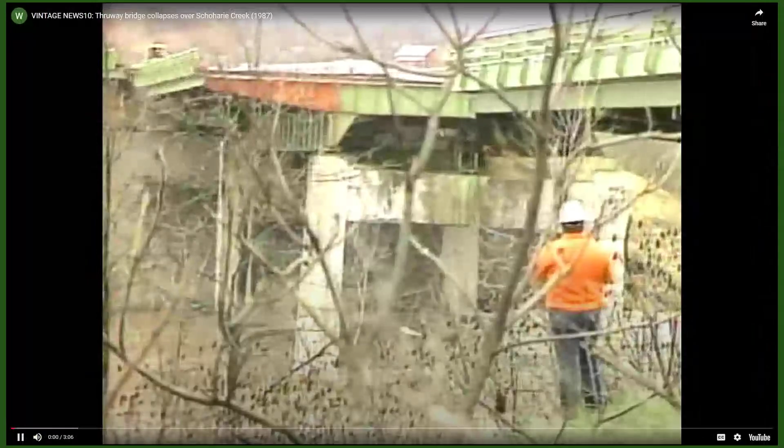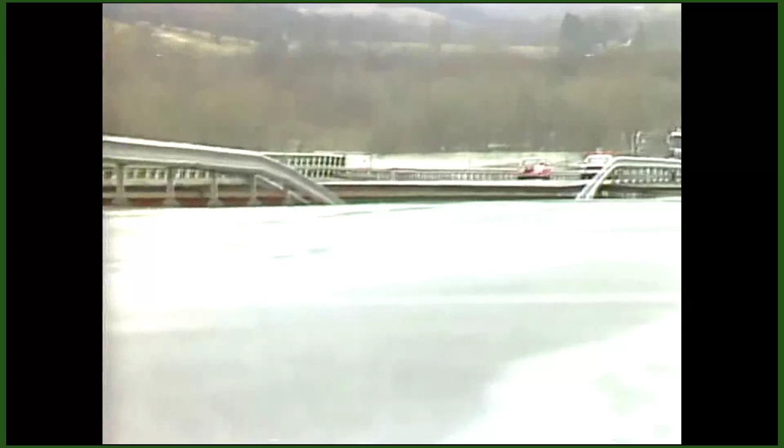Portions of the Schoharie Bridge continued to fall hours after it initially gave way. The collapse sent cars and a tractor-trailer plunging into the raging floodwaters below. Just how many lives and vehicles were lost remains unknown. One witness says 4 cars and 1 tractor-trailer; another says 1 tractor-trailer and 1 car. It sounded like lightning struck when the bridge went out, and it just collapsed from there. Witnesses say it was all over in 15 minutes. The eastbound lane went first. For the drivers of these trucks it was a very close call. 'It cursed me out when it went down.' Plenty of police and rescue crews arrived ready to help, but the waters were moving too quickly and the risk was too great. All they could do was clear the area of traffic and keep the curious a safe distance away.

The governor arrived to survey the damage and watched as still more of the 400-foot span came tumbling down.

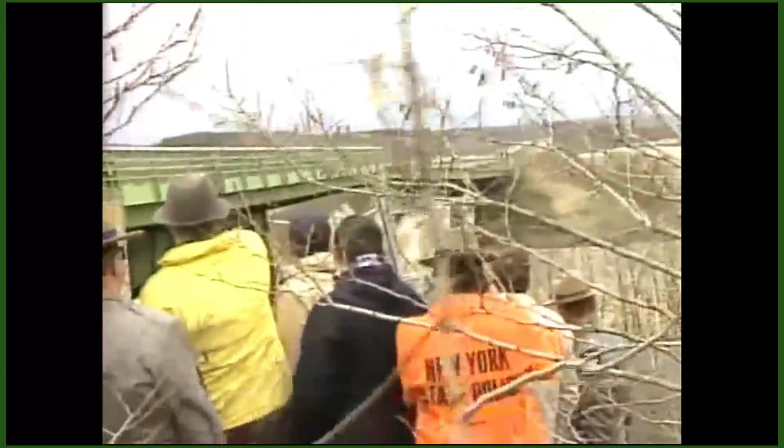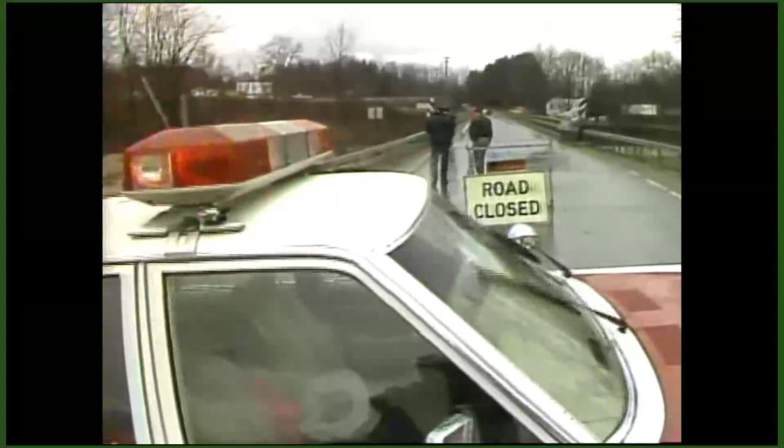We don't know exactly what caused the collapse of the span. We're going to be very cautious about this, and any bridge that the state police, the Department of Transportation, or the Thruway see as something to be avoided for the time being, we're going to avoid it. Now there'll be a lot of unhappy people and a lot of detours, but so be it. All of the other bridges along Schoharie Creek were closed since 6 a.m., including this one at Mill Point, which appears ready to give. Residents here want to know why this bridge wasn't also closed down. If there was any thought whatsoever that this bridge was in danger, this road would have been closed.

So there's a little more of that video, but it pretty much shows you what happened there. The National Transportation Safety Board figured this out, and the two terms we should be paying attention to here are scour and spread footings. That accident on Schoharie Creek is what caused the National Transportation people to figure out that we needed to start inspecting for scour.

The scour critical definition is here on the screen. The NBI coding guide item 13 uses numbers and letters to code scour vulnerability, and we'll go over those.

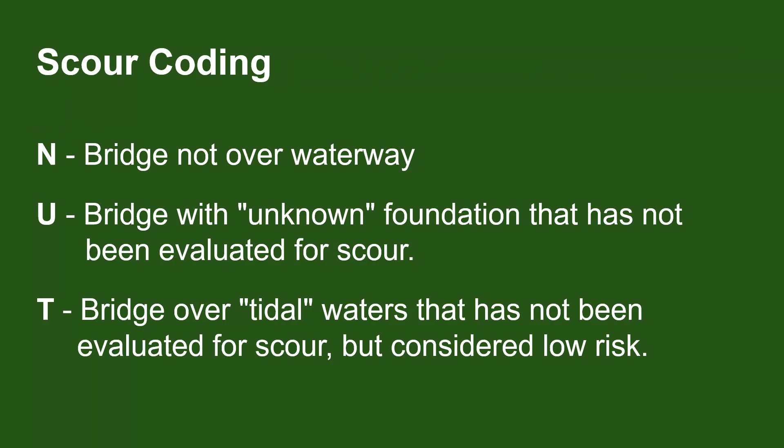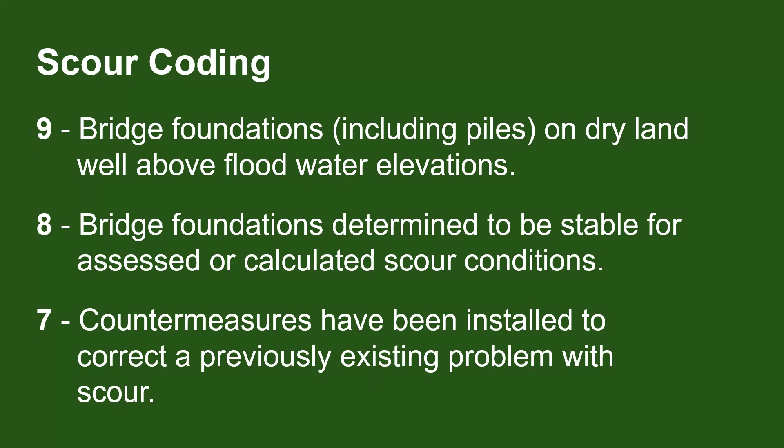The U is for bridges with unknown foundations. We have to consider those scour critical because we're not sure whether they are spread footings or pile. We just don't know, so they're going to be treated as scour critical. We don't worry too much about structures with a 9, 8, or 7. Sixes should be monitored because we don't know what their vulnerability is. And 4s have been identified as something that could use some form of mitigation, but hasn't been done yet.

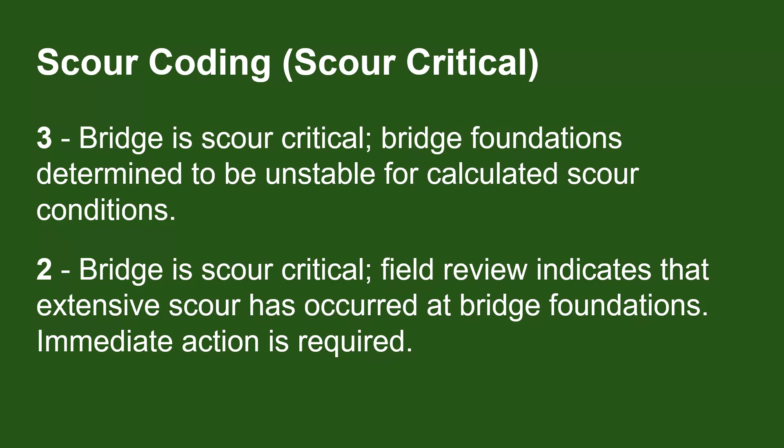Now here's a couple that are in the scour critical coding. 3s and 2s need to be monitored during high water events, and they're calling for current mitigation on all 2s. They've already located some problems with those that should be taken care of. Hopefully none of us will see 1s or 0s. A 0 pretty much is a bridge in the water. We just looked at that for Schoharie Creek.

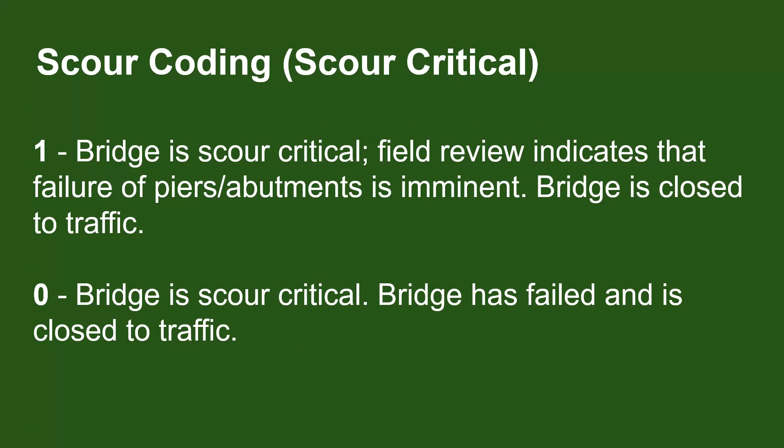So this is a picture of aggradation. Aggradation is the buildup of materials, usually in places that we don't want it. In this particular case, we've got a gravel bar forming where the channel should be.

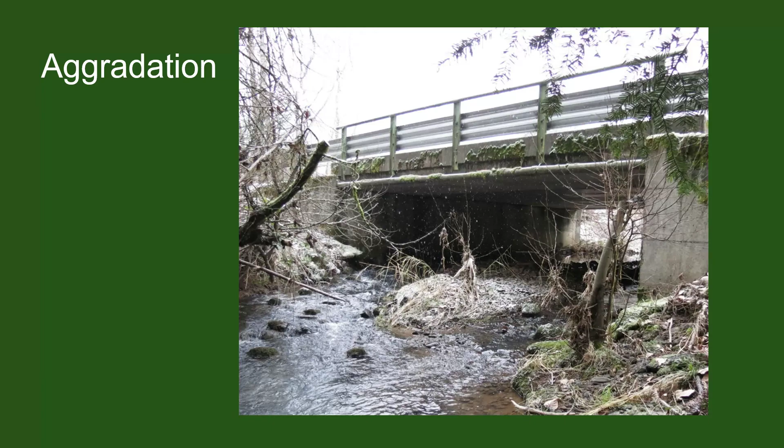This is degradation, and that is the removal of materials, again, usually in places where we don't want it. This happened at an abutment on one of Clackamas County bridges. It didn't adversely affect the bridge because the pile tips were deep enough, but it washed away the abutment to where eventually there was just a patch of asphalt going over the gap between the remaining abutment and the bridge. This can also be considered local scour. Local scour is something that happens on an object in the waterway.

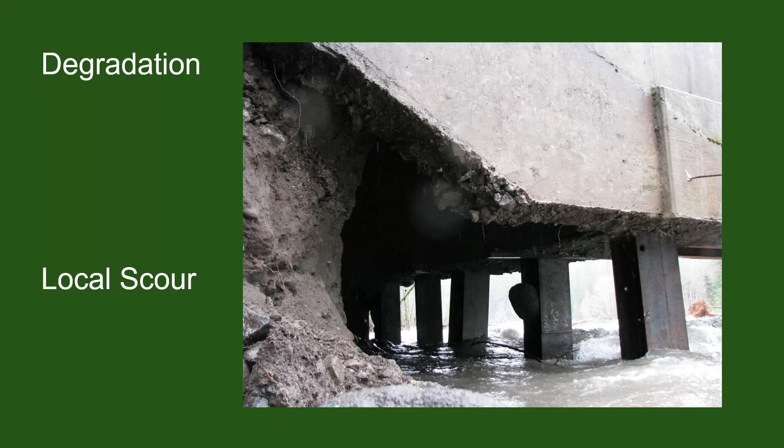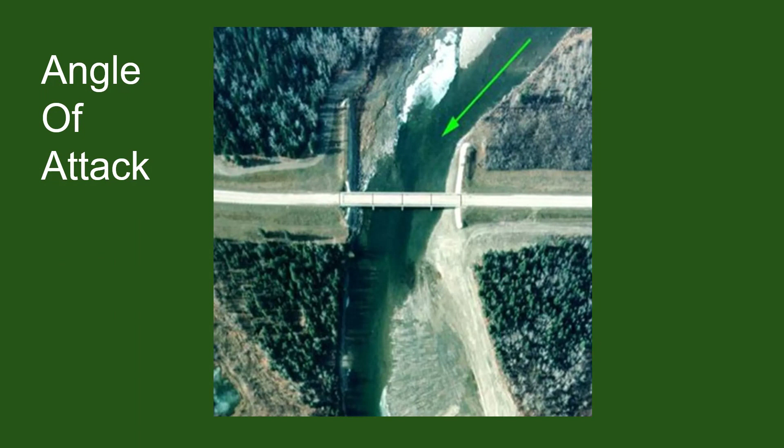A plan of action - so all critical bridges, scour critical bridges, need a plan of action. They include a lot of information, but essentially they're there to tell us what to do in high waters, how we mitigate things, pretty much everything to do with scour on that particular structure, and they are a requirement for all scour critical bridges.

Again, ODOT, the Oregon Department of Transportation, helped us with these plans of action. Here's all the information that's in a plan of action. It's pretty detailed. Some of it's more important than others, and depending on what your job is, it will change what's important to you.

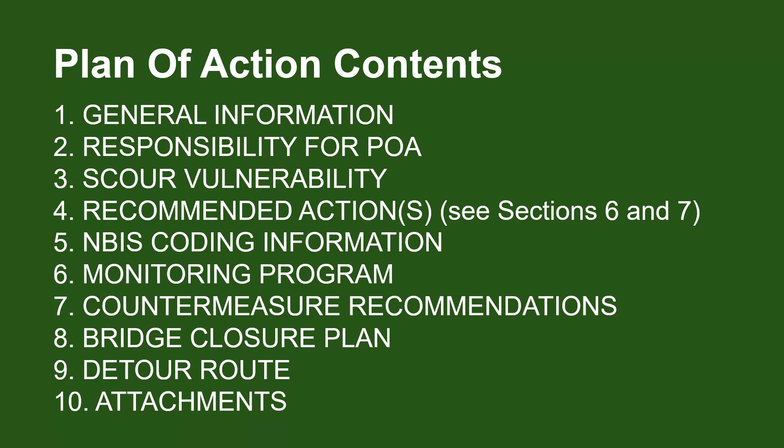So this one is probably the most important part - what type of footing is it? This one, we can see it's spread footings poured on bedrock. Who's responsible for the plan of action?

What is the scour vulnerability? The scour evaluation summary highlighted there is the current condition of the bridge. Below there's some history, but the current condition is what we're really interested in, and that's the information we need to take with us when we go to the field to do high water inspections.

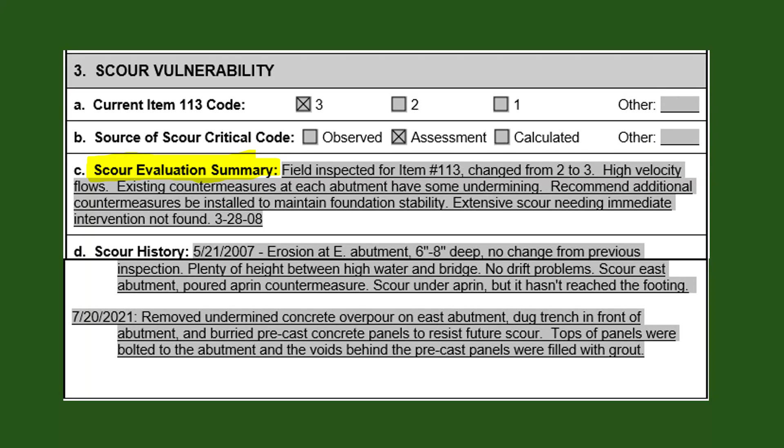So this is what we should be doing and what we have done. Recommended actions.

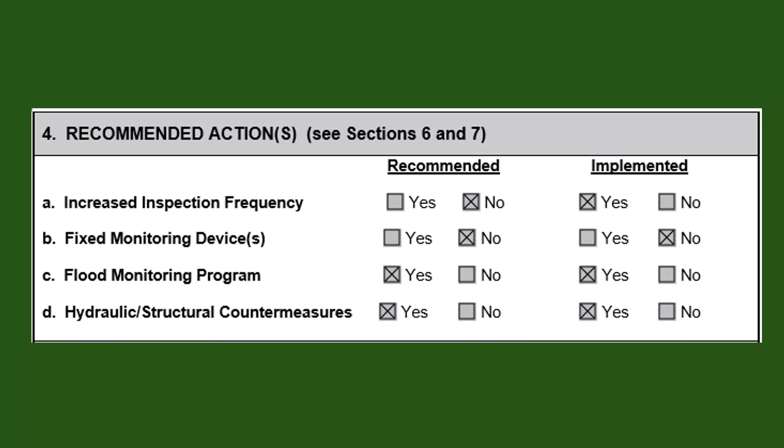In the monitoring program, the important thing is what we're looking for. In this case, we want to make sure the spread footings aren't undermined.

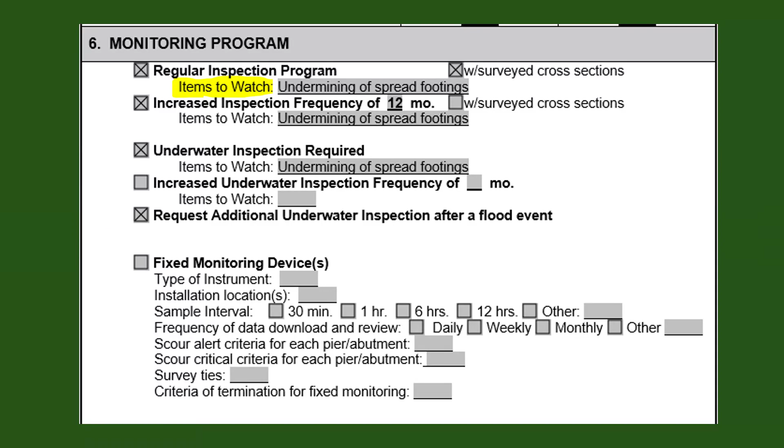This is further monitoring information. How are we going to inspect? When are we going to start? In this case, it says bank full. What stage of the river level do we go? And how often do we monitor it?

The how often is going to change with every event. There are times we can go up and look at a bridge and the water level maybe just hit bank full, and there's not a lot of problems we can see. Everything looks good, so we might not go back for 12 hours, 24 hours.

But there are times we've gone up and looked at bridges where we don't leave as soon as we get there. A good example was that bridge where the approach got undermined. As soon as our inspector got there, they didn't leave.

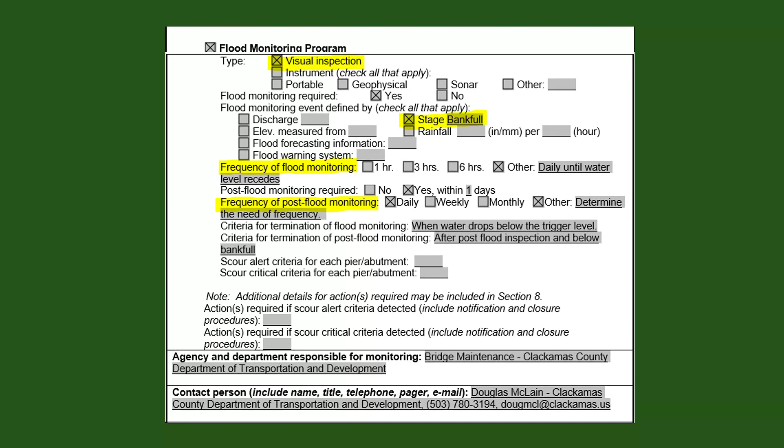Countermeasure recommendations. This is for that same bridge. It's sitting on bedrock, so there wasn't much we could do to improve it. There's nothing in there about what we were going to do to fix it.

This is a continuation of countermeasures.

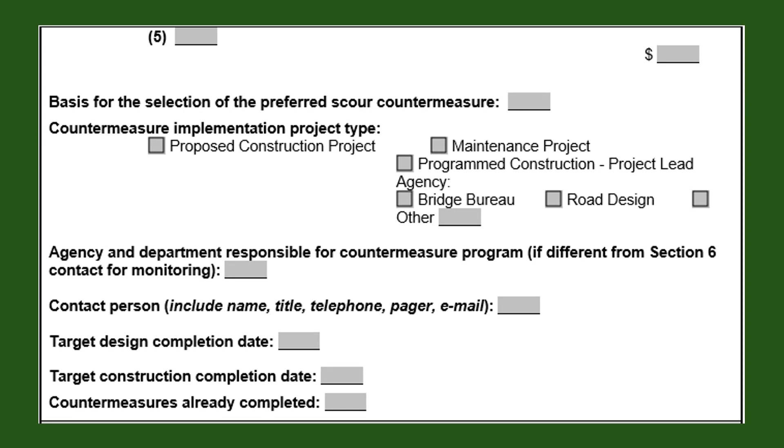Detour routes. This was on a dead-end road, so we didn't have one. But if you did, this is where the detail for that detour route is filled out, and there should be a document in your attachments showing that detour route.

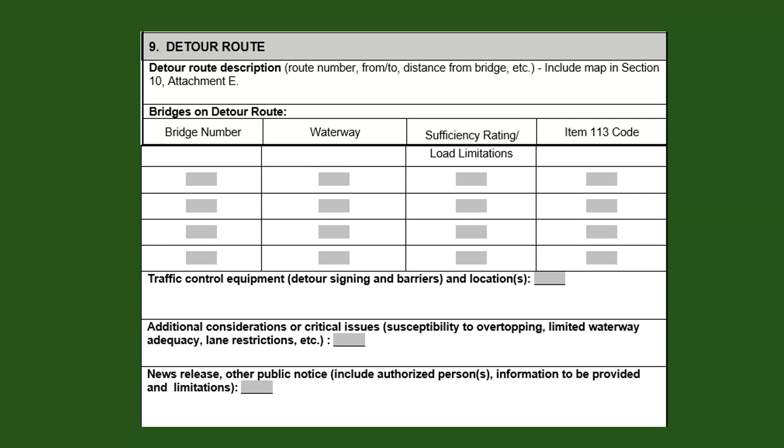You can see the check marks here. This one actually says it's supposed to have a map showing the detour route, but I guess our POAs need a little bit of work.

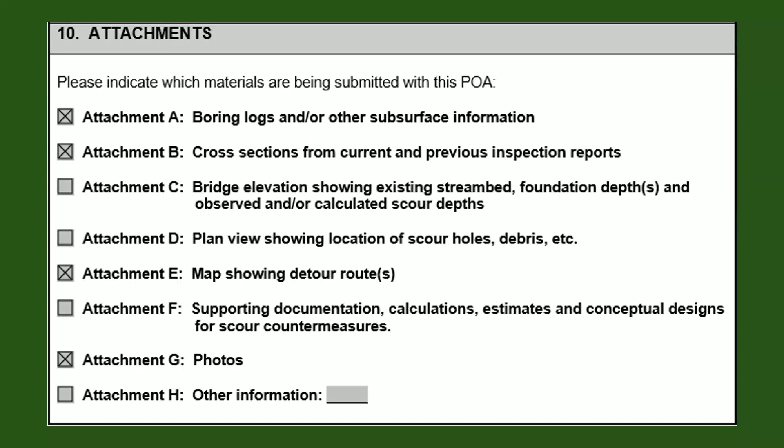This is a copy of one of the documents we take with us into the field for inspections. It's sorted by drainage and sub-drainage and identifies the affected areas of the foundation, what type of foundation, and any history that might be pertinent.

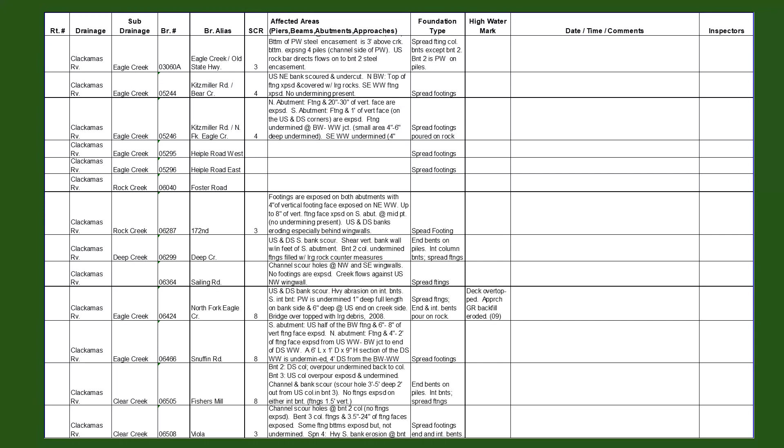This is a close-up of the most important part of that document. You can see the scour code rating, the affected areas, and what type of footing.

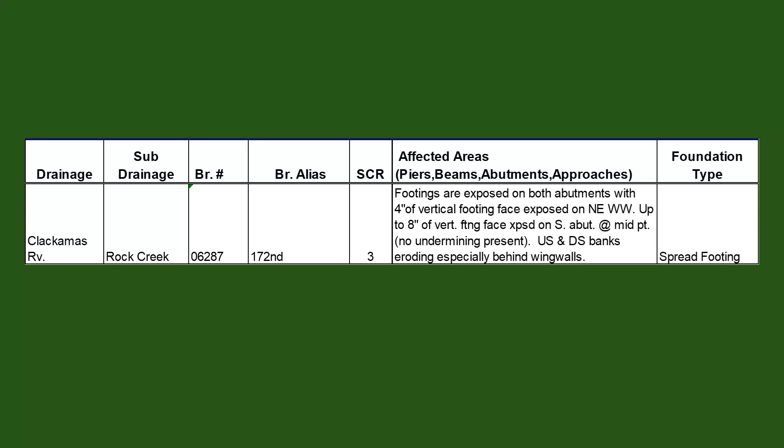Most of our sub-drainages, even the ones that have gauges, aren't going to have anything that predicts what the flow will be for the next few days. So we try to look at all the sub-drainages whenever we go out and look at the major drainages. If the sub-drainages aren't affected because the major drainage is reacting to snow melt, maybe we won't go back next time to look at the smaller drainages. But everything in the main drainage, if that NOAA prediction says we're going to bank full or action stage, we'll go out and look at all those drainages at least once.

So what do we look for when we get there?

Obviously, we should all know at this point not to drive through water. We have had fatalities in Clackamas County where we had an overtopping of a bridge and somebody did try and drive across it, and it cost them their lives.

So, pressure flow at the low bridge. It does say pressure. If we've got essentially a pond where the water's backed up and it's covering the lower chord of a structure, that's not nearly as concerning as if it's in a streamway where you've got velocities pushing against it. Most modern structures are a little different because of seismic design, but most older structures really don't have any type of reinforcement for horizontal pressures. So when you start seeing water flow against the lower chord, it's time to consider closing.

Vertical or lateral displacement - how do we know if something's moved? One of the best ways is to look at the guardrail or the barriers. Most of the time that bridge has a barrier of some kind that goes across and is attached to the approaches on each side. If the bridge moves, you're going to see a bow in that guardrail, up, down, right, or left. That's a really good indication if you've had some movement. The other thing you could look at is misalignment of the road striping. If you come up to a structure and the stripes don't line up, there's a chance the superstructure has moved.

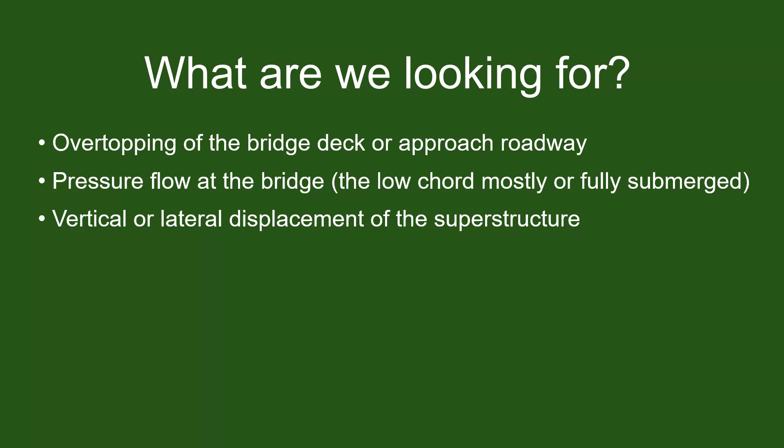Excessive horizontal or vertical separation - you're probably going to look for the same things you'd look for with vertical or lateral displacement of the superstructure. If the joints are out of whack, it's because the superstructure essentially moved. You may notice a place where, if you had rotation one way or the other, the guardrails or barriers wouldn't have shown it, but you could go up and look and say, hey, that joint used to be 2 inches wide and now it's 6. Well, you probably had some kind of rotation there if that happens.

The problem with damage is sometimes that damage is already there, but it helps if you know what your structures are. The question you've got to ask is: is the damage I'm looking at new?

Sinkholes in the roadway - don't forget, we had that problem where we lost all of the fill under the roadway, but we didn't have a sinkhole. All we had was a piece of asphalt, which wouldn't support much.

And debris buildup. Debris buildup isn't really scour, but when we do high water inspections, we're looking for that as well. A big pile of debris can put a lot of stress on that bridge and give you that horizontal pressure that you're trying to avoid.

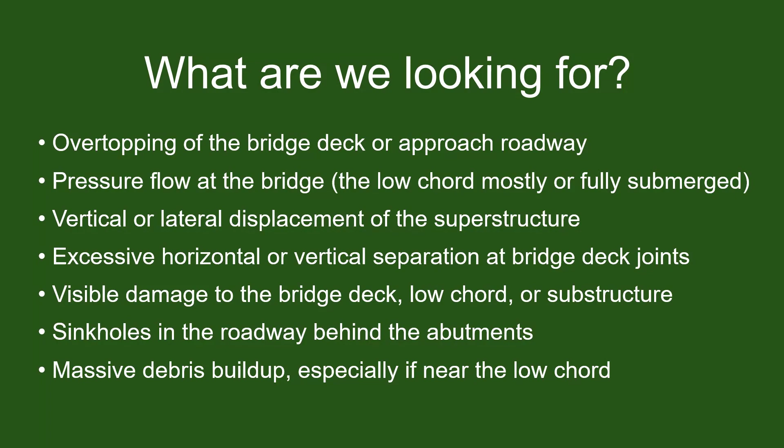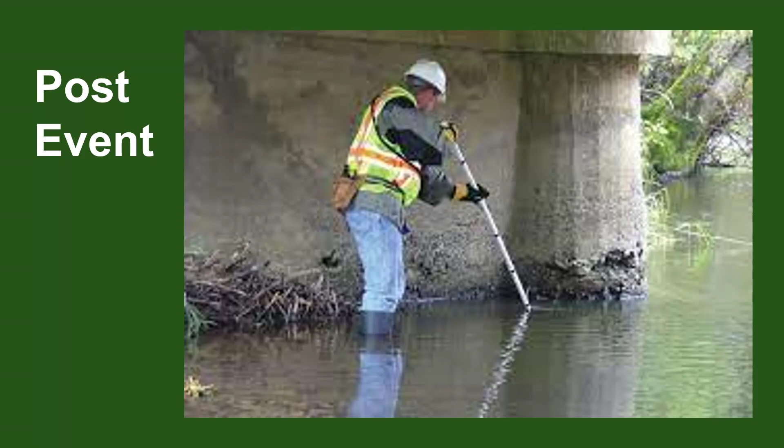In the areas you can't actually walk to, we'll get a diver out there and they'll put their eyes on it. In our case, all the diving is done by our state agency, and they will take a look at these on a regular basis and give us reports. If we had a situation where we thought there was some scour and we couldn't get to it, we can call up the state and say, hey, we think there's a problem there, and they'd send somebody out to dive on it.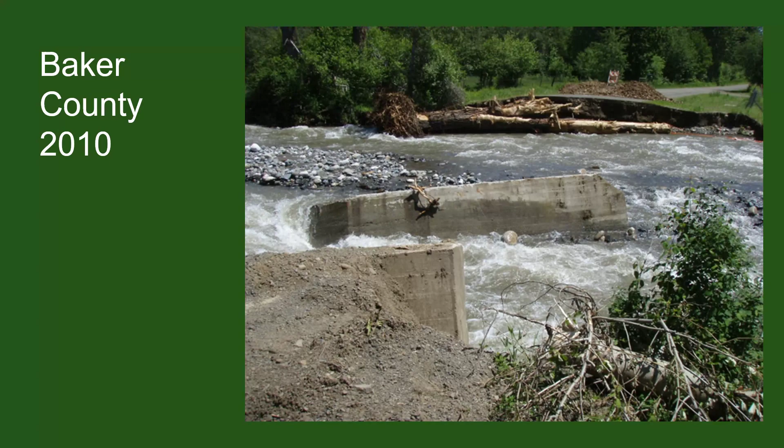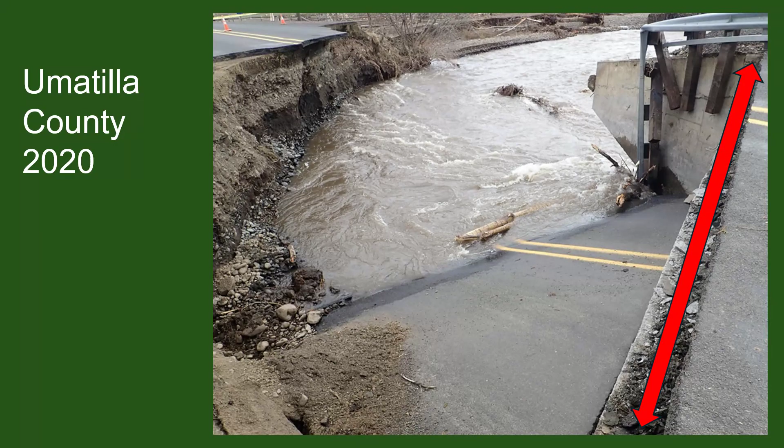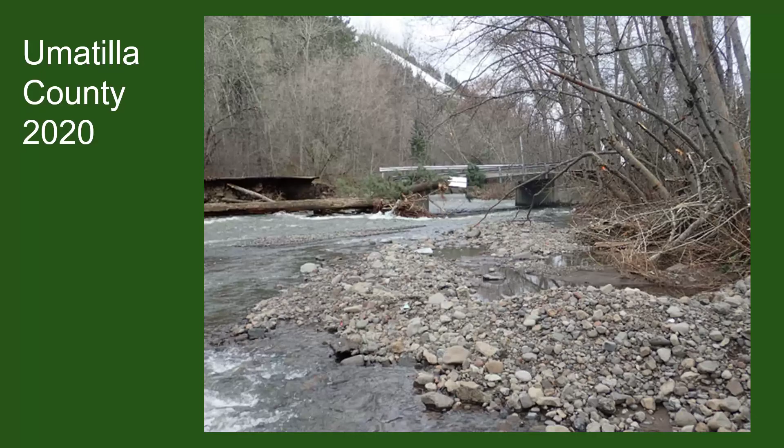These guys over in Umatilla County got hit pretty hard on this one. This is actually a pile bent that sunk. The pile tips weren't deep enough to prevent scour. Here's another view of it, looking from the other direction. You can see how that left end of the span is dropping down, where the piles failed.

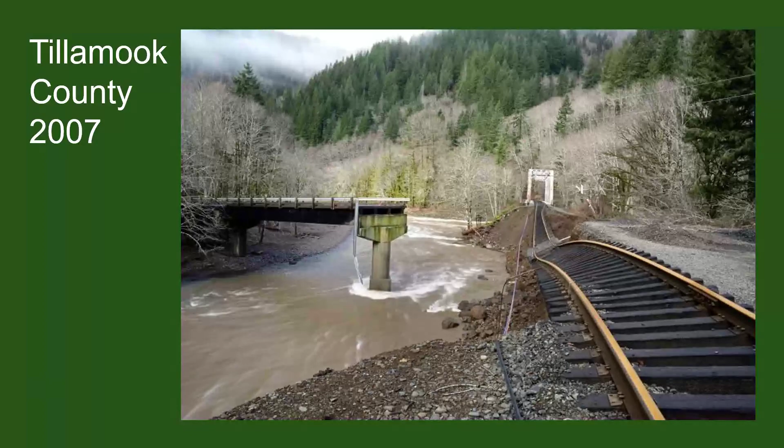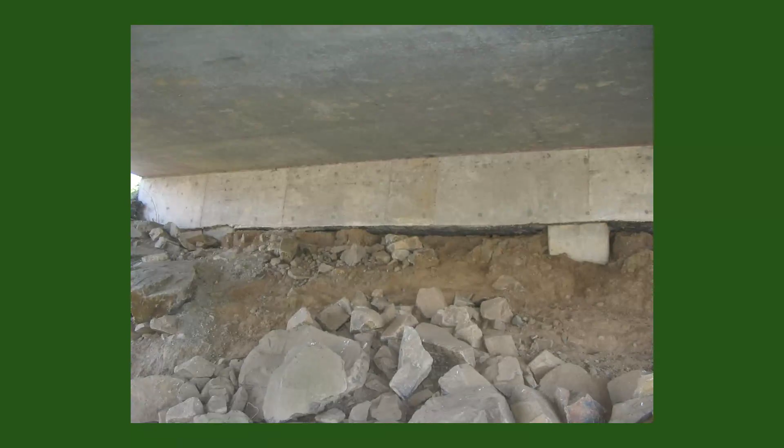So how do we prevent it? Here's a simple bridge where, if you look, that is the concrete cap, and it was starting to lose its fill material underneath. We figured a few years from now it would work back and get underneath the approach. So we thought we should just put some simple armoring in there. There wasn't a lot of velocity to worry about, but we put armoring along the bank, and it has prevented the erosion.

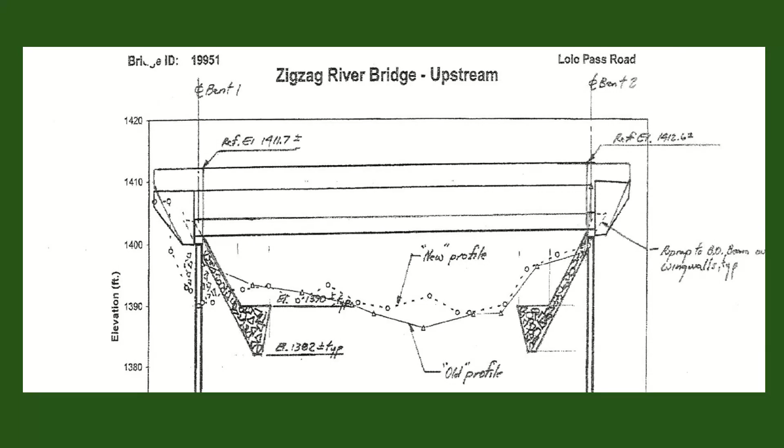If you do have to worry about higher velocities, sometimes they'll toe in the riprap wall like this drawing shows. Sometimes this is referred to as a golf club design. The head of the golf club is full of riprap, and it helps that armoring stay in place. The riprap head is actually buried well below the stream bed.

This is also that same bridge we looked at where the abutment disappeared and the piles were exposed. It had lateral stream migration. The solid line with the triangles is the original profile of the stream bed, and you can see how the original channel was in the middle. The dashed line shows what happened after the event. The middle filled up and it pushed the stream over to the right.

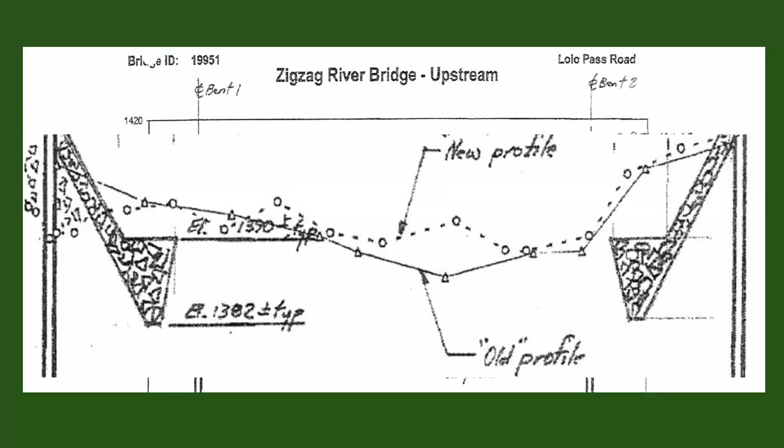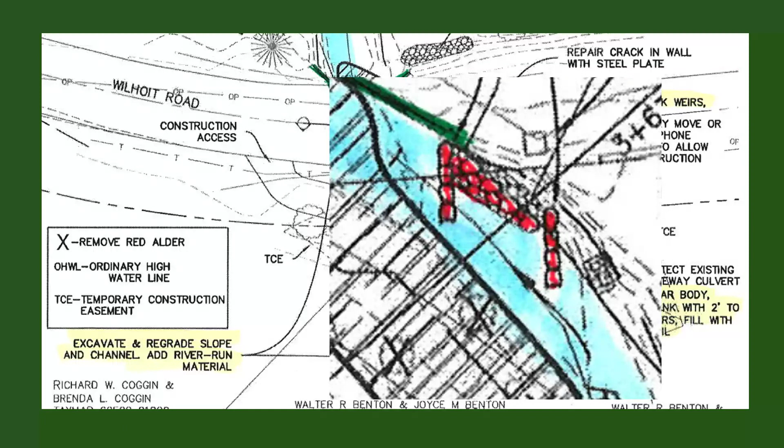This is what a porous rock weir looks like before it's been covered. Typically, when we're done placing those rocks, we'll cover them with what we call river run. River run is simply a pit run rock that comes out of a quarry that's built on a stream bed, and it's made out of big round rock, small round rock, and sandy gravels. Once you wash that all in, it looks pretty much like the original stream bed. You can see with this porous rock weir, the biggest rocks, the tallest rocks are at the right. It's angling upstream, and as you get close to the center of the stream, the height of the rock gets lower.

So to do this particular job, we had to de-water the site because we were going to put an excavator in there. To de-water the site, we had to put a cofferdam in with a fish net. We pumped around it with a couple of pumps, one backup, one primary. The water was pumped through the site into a diffuser downstream, and the idea of a diffuser is to keep silt from building up. Sometimes, depending on your location, you're required to put a downstream cofferdam and fish net in as well, because the slope is such that the water could back up into your excavation.

The big challenge with this type of work is keeping the turbidity down. We don't want muddy water going back into the creek.

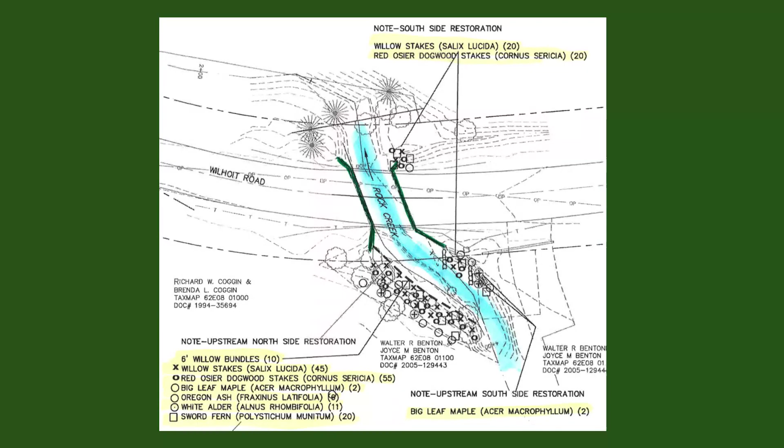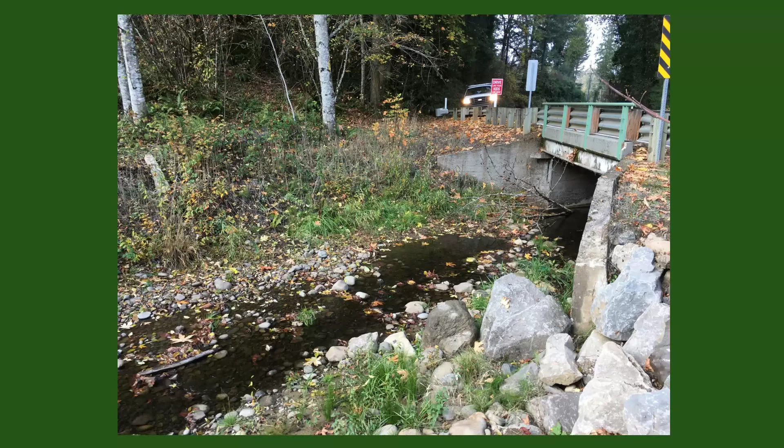This is a concrete floor bridge. The slide you're looking at now shows you the edge of the bridge. The part on the left shows you an undermined area where the scour hole had actually worked its way under this concrete floor.

This is the downstream end. You can also see where there's a scour hole at the bottom end where the flow was coming off of that concrete. So here's our repair plan.

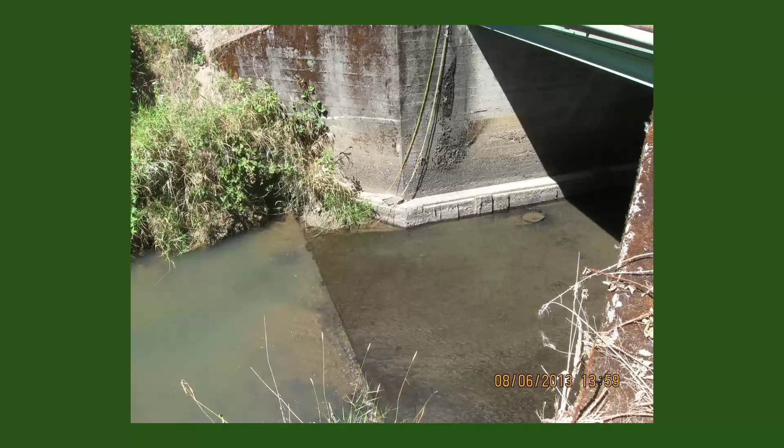The flow is from right to left. We intended to fill the scour hole at the upstream end with boulders and river run, making sure that we got all of that fill material underneath the undermined area. The downstream end, we not only filled with boulders and river run, but we built what's called a full spanning porous rock weir.

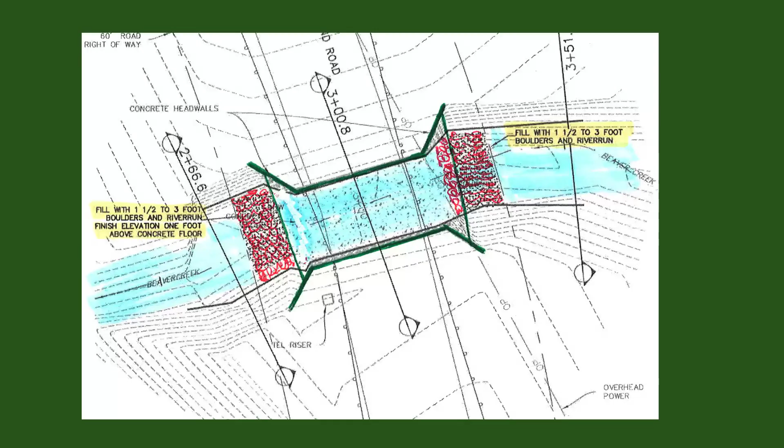This is an example. I think this is that actual bridge where we installed a porous rock weir. It's essentially the same as one of the barbs that comes out. The lowest point's in the middle. It's angled upstream, but it spans from one side of the waterway to the other. When buried with river run, it fills up and looks just like the bottom should be.

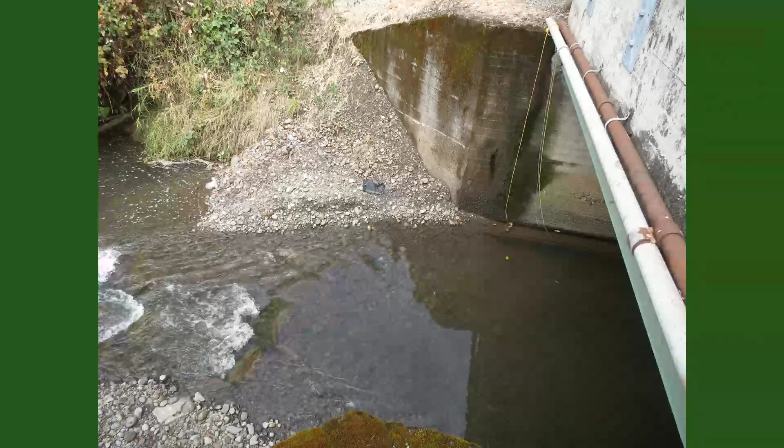Here's an after picture. You can see how the gravels are up on top of the concrete now. And this is the downstream end. You can see the center of that rock weir, and you can also see that there's gravels upstream of that.

So here's another bridge that had a multitude of problems: bad angle of attack, aggradation, degradation. The channel essentially is pushing at the abutment on the right. We wanted to put it back towards the center.

So here's the plan. The flow is from the bottom to the top. We decided to install a porous rock weir up at the top of the bridge, excavate all of the hashed area showing aggradation, and then we were going to armor the one bank that was getting undermined from the flow.

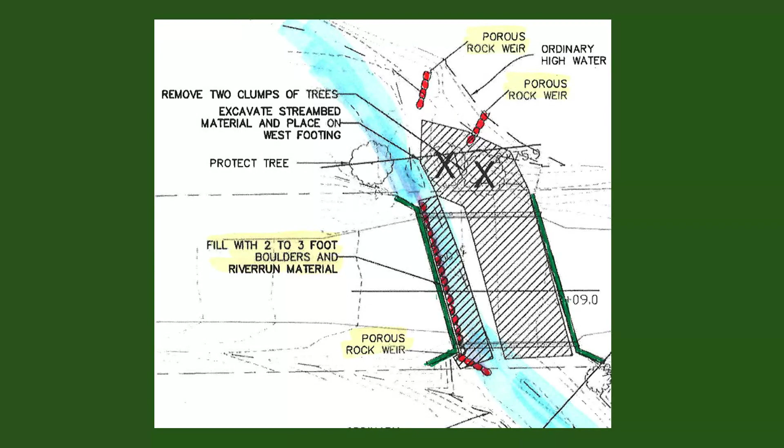This is one of the ways that we armor an abutment. You can see on the left side there are a row of boulders. Depending on how much room you have to work with in the situation, there could be one, two, or three rows of boulders there, and then we'll cover it with river run. Now that looks like a really dirty pile right there, but again, when it's washed in, it looks pretty much just like a normal stream bed.

There's your before, and there's your after. We saw this one earlier in the example of aggradation. We wanted to put the channel back in the center of this structure.

So here's our repair plan. We have the flow going from right to left. The idea was to cut out all the aggradation at the downstream corner there and in between the centers, and armor both banks.

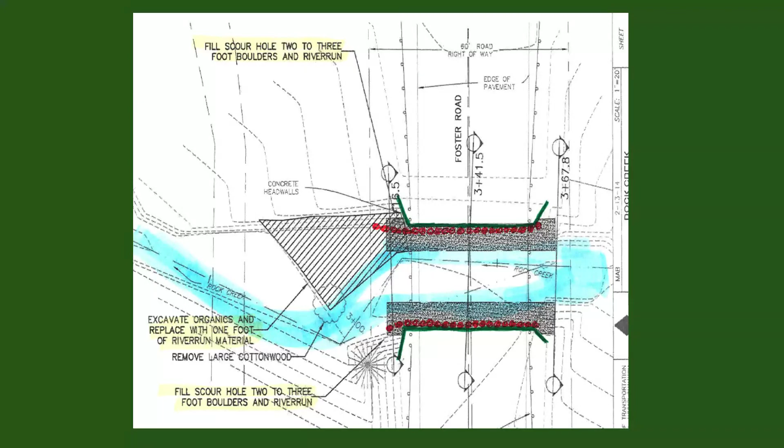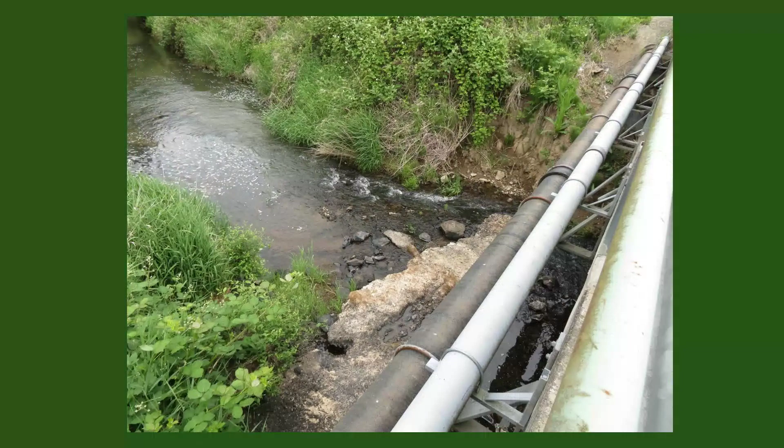So this particular structure, the creek bottom had disappeared probably a couple feet over the years and exposed a water line, an abandoned water line that was covered with concrete. What that did was cause the water to flow around the concrete, and it was starting to erode the bank on the far side, as well as it was kind of an impediment to fish travel or fish passage.

Our plan was to remove the pipe and the concrete, create a couple of full spanning porous rock weirs, and cover them all with boulders and river run.

Here's our before. There's our after. Again, if you look at the far bank going up along the pipe, you can see what river run looks like after it's had a chance to wash in.

This structure had migration over to the right side. The creek should be running right down this center bent that we're looking at, but it had migrated over to the far side. If you can see it, it's starting to undermine the timber back wall there a little bit. So our thought here was to move it back to the center as best we could.

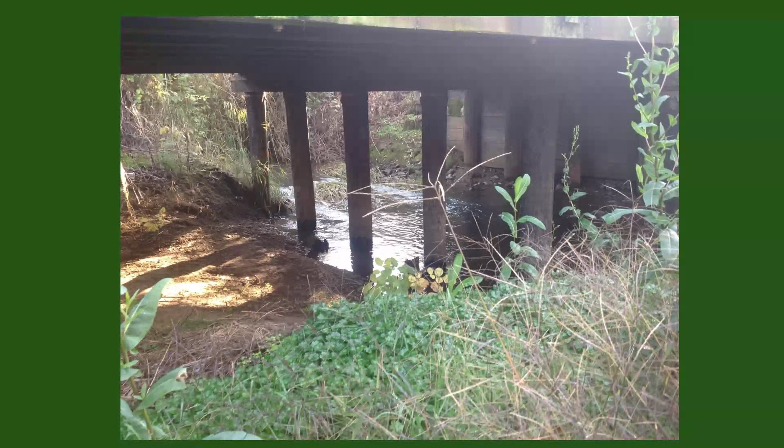Here's our plan. The flow goes from bottom to top. We were going to install a porous rock weir at the top to deflect the creek back towards the center and armor both sides. Also excavate the aggradation.

One thing I'll mention about excavating aggradation: if the stuff we're digging out looks like good material, we'll stockpile it and put it right back where it came from. If it's silty or clay or something we don't want back in, then we'll get rid of it and replace it with something else. But we will reuse the native soils wherever we can.

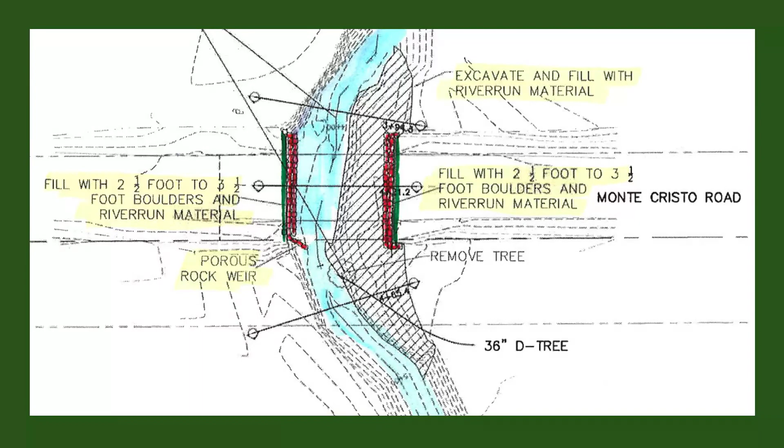So here's our before and here's our after. During this project, we determined that with the angle of attack coming in, there was absolutely no way we were ever going to be concerned with the left abutment being undermined. So we actually didn't dig all the way down and armor that side. We dug a lot of the aggradation out, got rid of all the silty materials, and covered it back up with some river run. And it hasn't eroded at all since then.

Here's one where you got a bad angle of attack, degradation on the left, aggradation on the right. It was undermining behind the wing wall and this footing on our left. This is actually a two-span bridge, and where it was coming in, it was hitting the middle bent and undermining that bent as well.

So the flow is from left to right on this one. Here's our repair plan. You'll notice we not only had a couple of barbs at the top of the wing wall, but we went upstream quite a ways and put a barb in there trying to get it away from that side. We moved it a few feet.

We weren't able to get it back in the center or change the angle of attack, but we did get it away from that wing wall to where it wasn't eroding anymore. The other thing this plan shows is armoring of the center bent, which was completed.

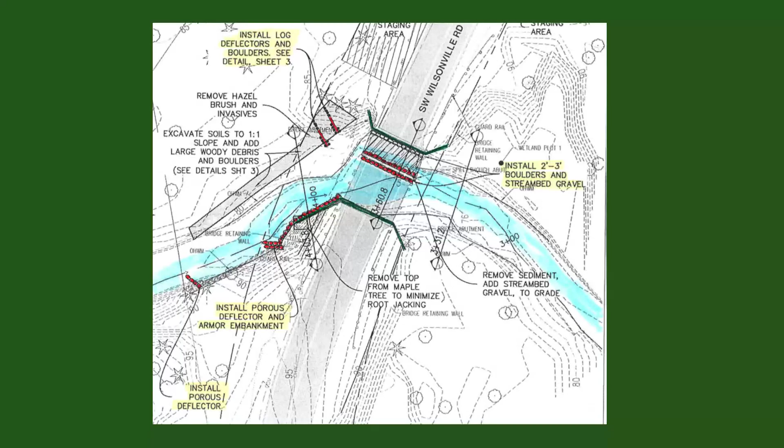So there's the before and there's the after. Again, you can see we didn't change the angle of attack much, but we were able to move it over away from that wing wall.

There's a few other methods here. This is one we installed, called coir rolls - a roll full of some kind of fiber. I'm not sure if these were coconut or what, but they're fiber rolls, and you can stake them in, and they will take vegetation really well.

This one's probably been installed 3 or 4 years. The picture on the left has probably been there 3 or 4 years, and it's really part of the bank now.

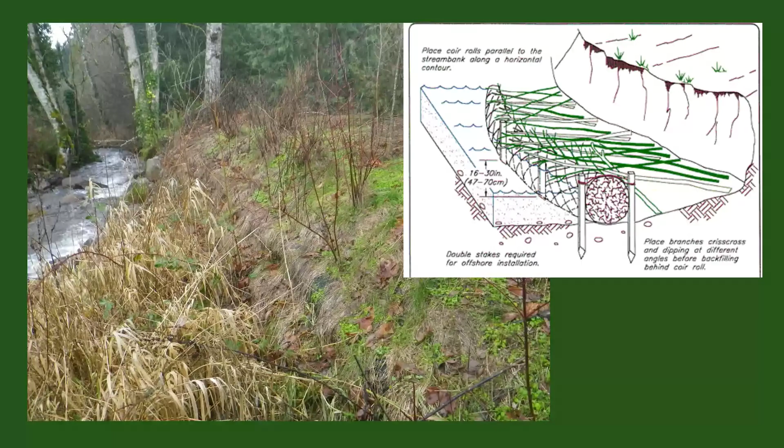This is a picture of revegetation for stabilizing the bank. They didn't do anything other than put willow and other woody material in there. On this side of the mountains, we typically use dogwood and willows for our stakes, and they grow really well.

There's a lot of different mitigation methods out there. One of the things we have to be concerned with over here is the Endangered Species Act. We've got endangered salmon and steelhead and lampreys. So we have to be real careful with our water quality, with how we treat our fish, and our mitigation methods are kind of controlled by that.

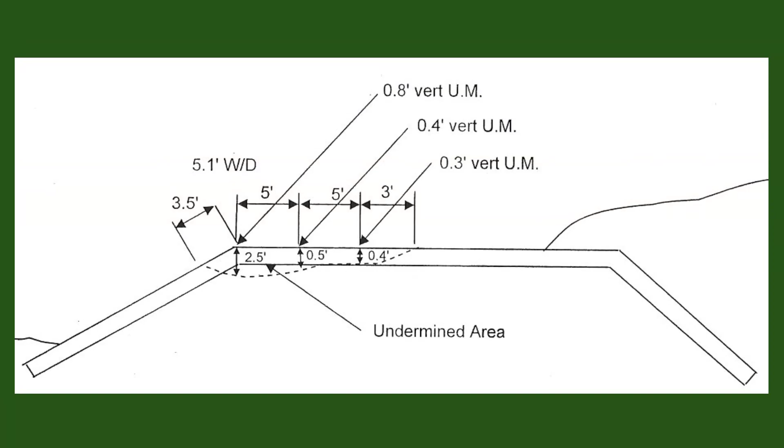This was probably Clackamas County's big first dewatering type of repair. This is showing the south abutment, and there was a section divers found - ODOT divers found - that was undermined. There was also a problem on the north abutment. Now, this is a spread footing, so we were real concerned that it was going to lose its support.

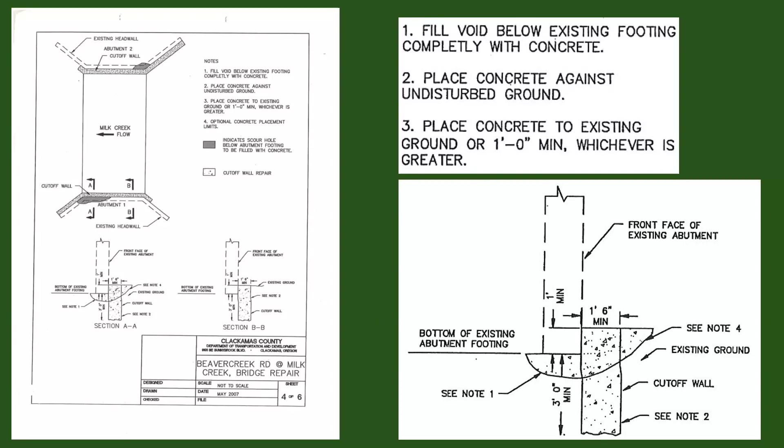Here's the bottom right showing a close-up of the repair plan. We essentially went in and dug a trench 3 feet below the existing footing and filled it up with concrete. When we did that, we not only filled up the void, but we made the scour have to go 3 feet lower before it could get under the footing.

But to do that work, we had to dewater. Our method was using plastic sheeting and sandbags. To get them under the bridge, we hung a beam with an electric trolley, and we were able to place all of our sandbags under the bridge. This is our completed cofferdam.

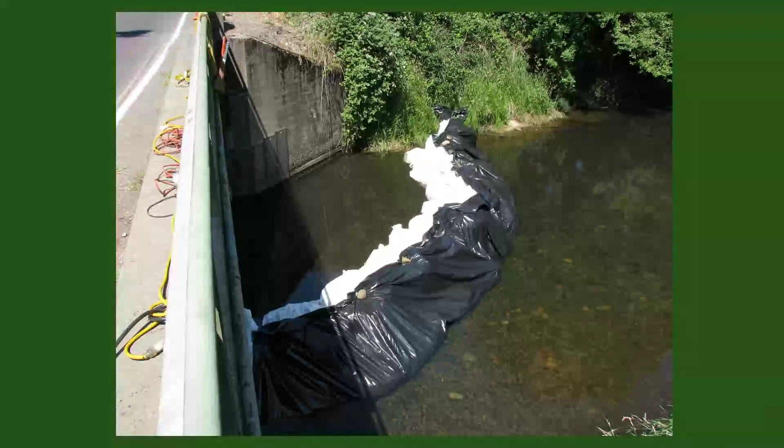We don't use this type of pump anymore, but we do always use a fish basket. That's a screen that means we won't be sucking up baby fish. So we started a dewatering process.

Once we start dewatering, the next thing is to remove all of our fish. At this time, we had a fish and game guy that worked with us, and we would go in and shock the fish. Typically, it might take us 3 or 4 passes as the water is receding and pools create, to try and remove all the fish.

Fortunately, we now can do our own shocking. We've had some guys pass the training class, but even at this time, depending on the circumstances, it may take several passes to get them all out.

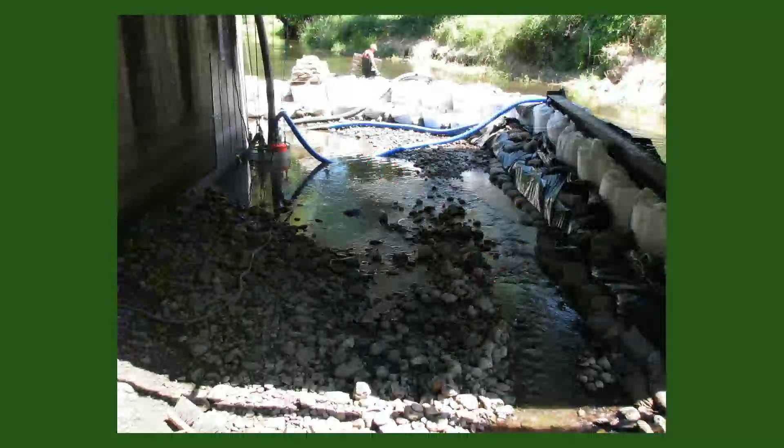So this is after we've done most of the draining. If you look at the right side of the photo next to the sandbag wall, you might see ripples in that water right there, and that's because that's flowing water coming in through our cofferdam.

We had a really tough time stopping water because this is a cobble bottom and cobble leaks. So the first thing we tried is more sandbags, a lot more sandbags, but that didn't work either.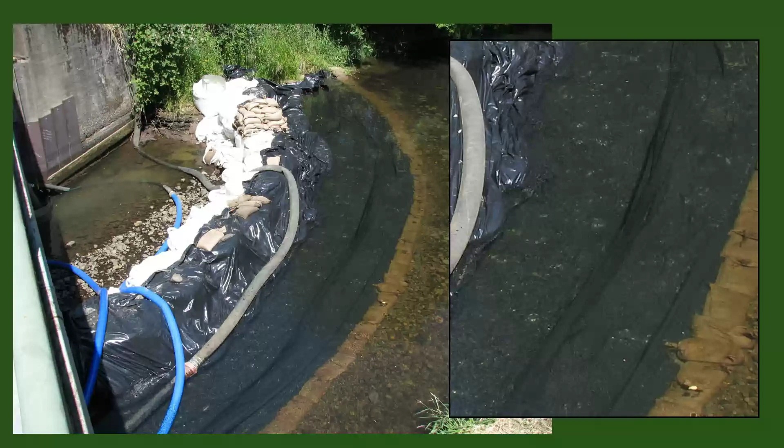So eventually one of our guys figured this one out. If we stretch our plastic upstream, we can toe the plastic down, and it prevents the water from going into that cobble. If you look at the close-up on the right, you might see that plastic looks like it was vacuum packed to the bottom. That's the water pressure trying to shove through that cobble.

There's a few things about this method you have to be careful of. You've got to make sure there's nothing that'll poke through your material between the cofferdam wall and the toe of that plastic. If you look carefully in the picture on the left, you might even see a difference in color between where the row of sandbags is and the stream bed 3 or 4 feet upstream. That's because we removed all the big rocks and debris.

So when we put that toe of plastic down, it was a smooth bottom, and we sealed it as best we could. It's the way we do all of them now, and it works really well. The farther up you can put that plastic, the less leakage you're going to have.

So once we finally got the water under control, we brought in our excavator, and we started removing our temporary repair panels.

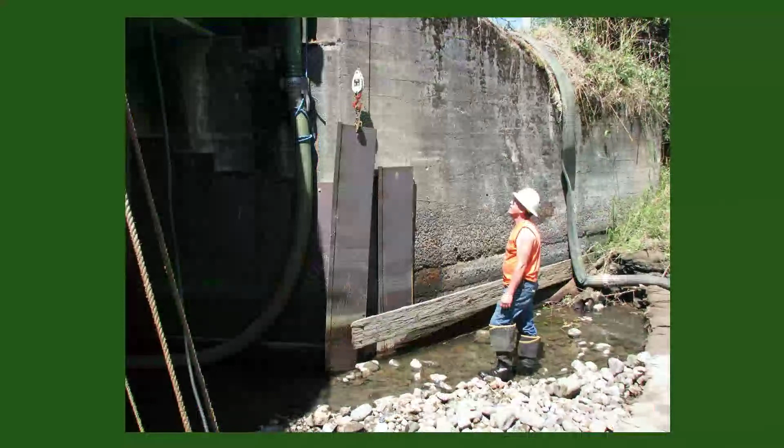So when we first found this hole and weren't able to go in and do this job, we didn't want it to get any worse. So we manufactured these panels out of plate and flat bar, and we just drove them into the stream bed with a 60-pound hammer. That prevented the scour from getting any worse while we were waiting.

One interesting note: before we got approval to do this, ODFW, our Fish and Wildlife people, had us cut holes in the panel wherever it was going over a void so that fish wouldn't be trapped.

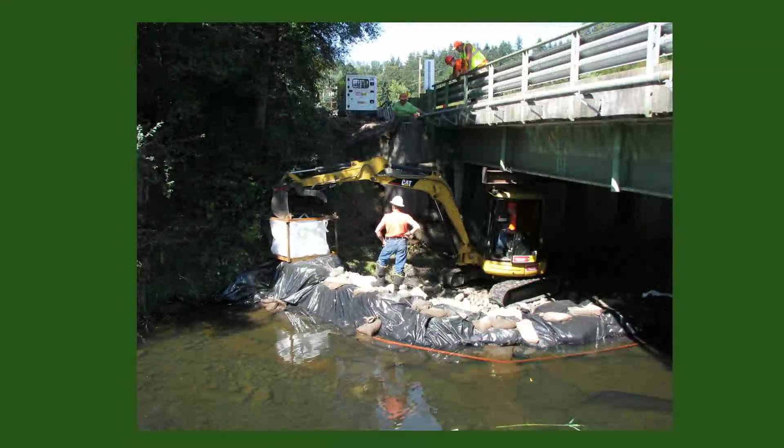So we're coming down to the end of one trench on that side. We're dumping into these 3 cubic yard sandbags because the stuff we were digging out of there was not suitable to put back. I mentioned earlier that we try and reuse our material, but this is not the type of material we would have wanted to put back.

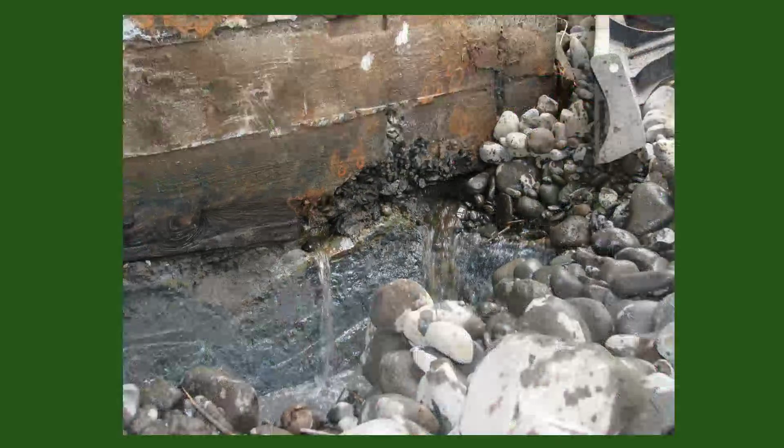So here we are checking our trench, making sure that we're at depth. This is showing where the edge of the void was as we're digging up. You can kind of see it's a clayey silt. Pretty hard to dig with a shovel, but as far as erodible materials, it's definitely eroded.

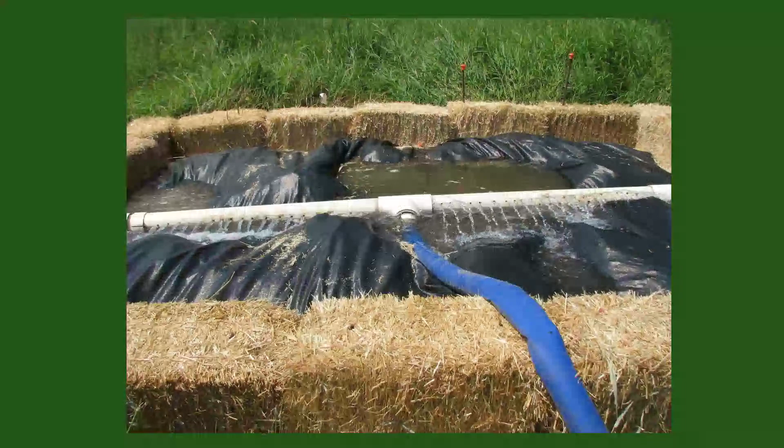So we cofferdammed around this site, and most of the water stayed clean, but the water that was flowing into our excavation had to be pumped out. Now that water that's coming out is going to be silty and dirty, and we needed to filter that out.

So we created this big filter area using hay bales, filter bags, and this diffuser that actually had a little tube of flocculant in it to help the silt drop out. We were able to filter our water to where it didn't run back into the creek dirty.

Over the years, we found that the best way of filtering water is to pump it through the land. One of the first things we do on a scour project is try to find somewhere to pump our dirty water to where it'll be contained and eventually have to filter through the ground before it gets back in. If we have an area where we can't do that, we'll do something more substantial like the hay bales and filter bags. But typically the best way of filtering water is to find some place where it'll just pool up and naturally go through the soil.

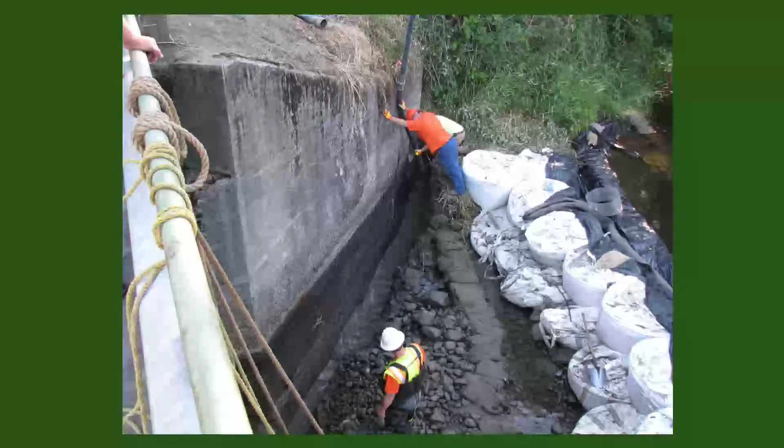So here's where we're starting to pour our concrete in. We talked about the dirty water coming out of an excavation from digging. When you have dirty water that's being forced out of an excavation from concrete, it definitely needs to go through a filter bag and into an area where there's absolutely no way that concrete water can get into the creek. It's really important because it's very hazardous to fish. So we always use filter bags whenever we're pumping water that has been exposed to concrete.

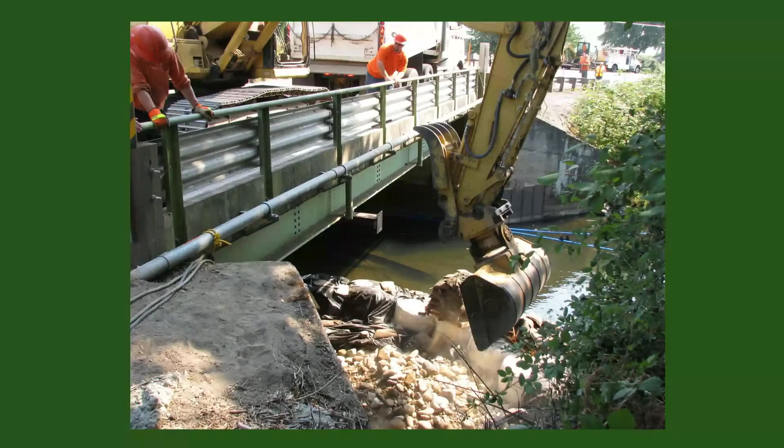Here's one where I got a call from Rick Shorb, the old retired ODOT diver. He said, 'You guys have a problem.' And the problem was we had some fairly substantial undermining under a fairly substantial structure, right under one of the main columns. This was holding up a pretty good sized deck truss bridge, and that undermining was right under one of the main columns.

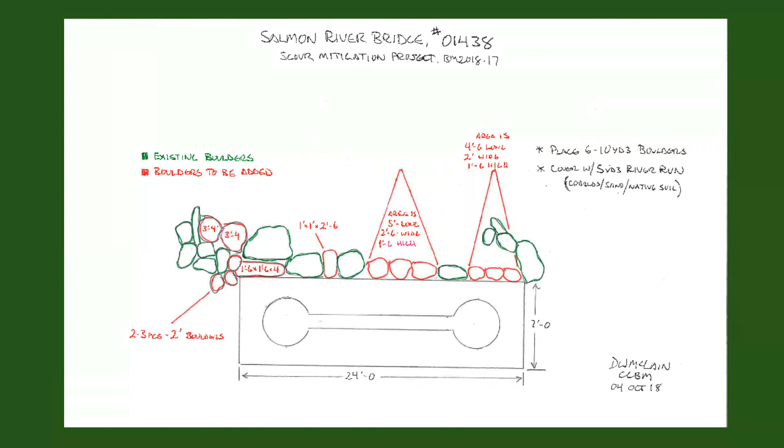This was a fairly good drop down to the river from the deck. There was some concern that the weight of the outriggers was going to punch through the deck. So we made sure that when we deployed this thing, we went right over one of the bents or one of the transverse beams in there for support, so we weren't just over a deck with nothing underneath it.

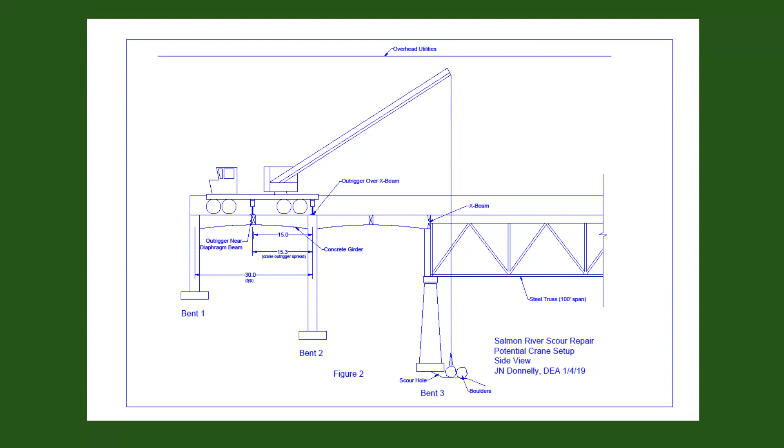The guys spent quite a bit of time sorting rocks and making sure we had the right ones. They actually went as far as to drill them ahead of time and stage them in the back of the truck so they came off in order.

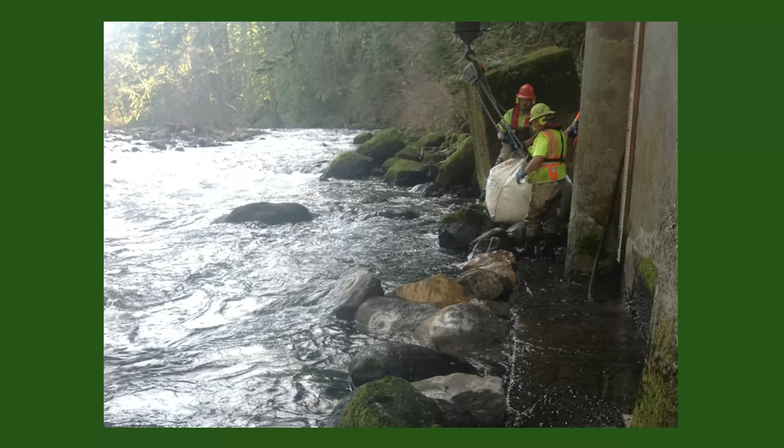Once we got our boulders in place, we wanted to cover it with river run, and the way we figured out how to do that was using cubic yard sandbags. We'd get them positioned over where we wanted to dump them, and then we just cut the bottoms out of them.

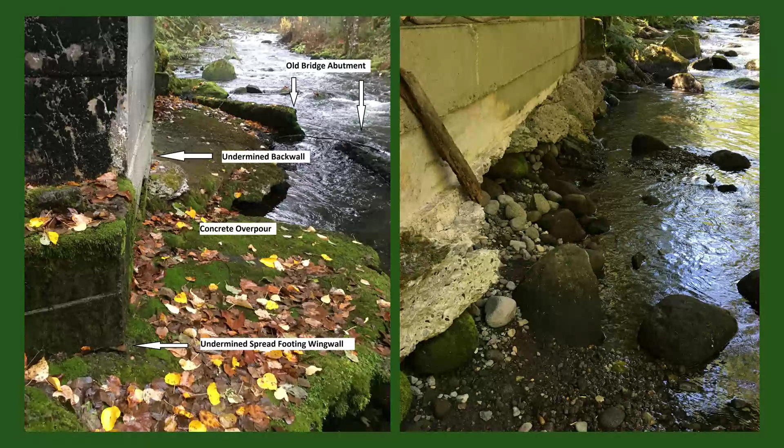So Still Creek Bridge, this is one of the latest ones we did. Before my time here, there was some undermining on this abutment, and they went in and simply poured concrete over the boulders and the undermined area to protect the bridge.

Well, 20, 30 years later, probably 30 years later or more, we found that there was some undermining not only under the overpour, but we could poke our way back in there and realize it was going under the bridge. How much under the bridge, we couldn't tell until we removed the overpour. The picture on the right shows where we were starting to break the overpour out, and right next to that stick, you can see where there's undermining under the footing.

One of the things we didn't know when we tore into that was that this bridge was actually sitting on piles. So if the undermining kept going, would the bridge have failed? Probably not, but we would have started losing fill on the approach. So even though we found piles in the bridge, it was still a good repair, and it was something that needed to be done. Unfortunately, a lot of the structures we have, we just don't have plans for.

So here's a plan of how we were going to repair it. We're going to precast concrete panels and bolt them to the abutment. We are going to dig down deep enough below the existing grade that we weren't worried about the creek bed undermining the concrete panels that we were putting in. We anchored these panels probably 4 inches off of the abutment, so we had room to pump grout behind them when we were done. So they were secured with bolts and filled with grout.

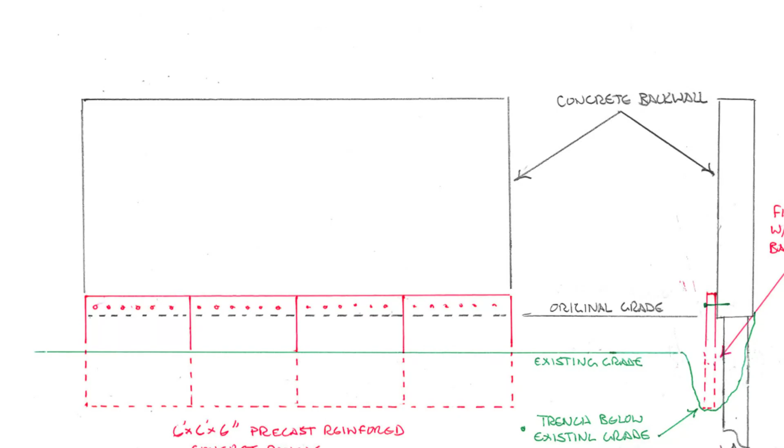Okay, that was all I had.

Doug, that was fantastic. Thank you. We do have a few questions that I'm going to start peppering you with, if you don't mind.

So on that Salmon River repair, did you guys end up putting some flowable grout underneath the footing on that one? We did not. No, the concern there was the dewatering, because if we put grout in there, we would have had to completely separate the work zone from the water. And the engineers felt like the undermining wasn't bad enough that we needed to put that in there. So they were happy with just stopping any further erosion.

Oh, perfect, perfect. And then, yeah, I guess that was one of my questions. You showed a lot of different plans for different repairs. Is that something that the maintenance crews are developing with your knowledge, or are you looking for outside resources? Who puts those plans together?